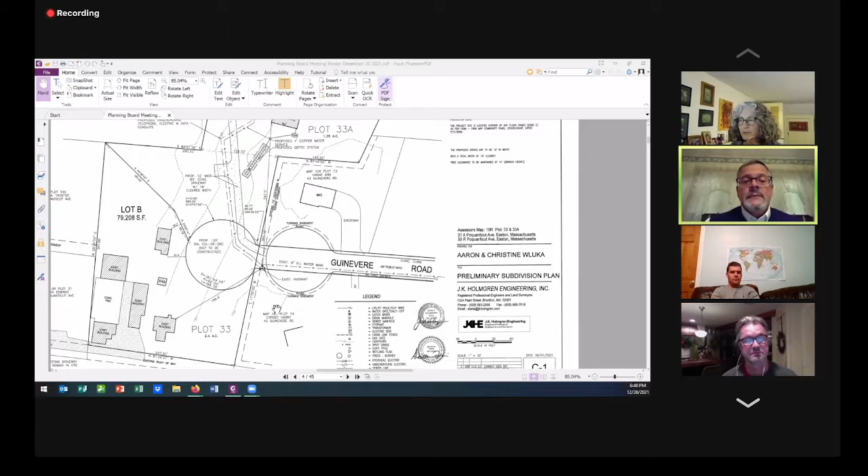So really that was the only significant change we made. We had a deed reference we wanted to freshen up, but besides that, that was the biggest issue, Mr. Chairman and board members, just eliminating that driveway. There was some concern from the neighbors about a possible cut-through from Guinevere down Aaron's driveway and out to Poquanticut. Eliminating that, I think, took care of that concern, or at least we hope it did.

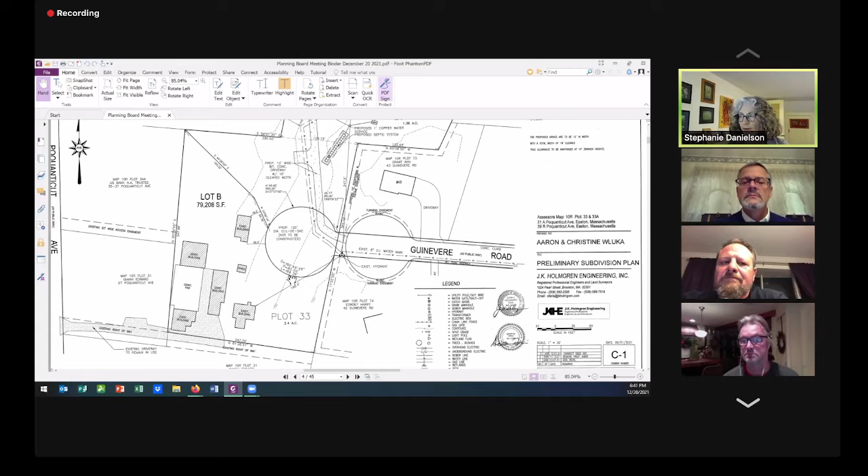I'm assuming everyone can see the plan on my screen. Yes. Okay, so the driveway that Scott was just referencing came off the cul-de-sac here and went over to the Wluka home here. That was the driveway that was eliminated.

And they did provide updated deed information confirming ownership of the properties. And I know there had been discussion of a deed restriction and possibly another method to ensure no future development. You want to touch on that, Stephanie?

Yes, I talked with town counsel. The board had mentioned two methods of ensuring that the lots weren't further subdivided in the future. One was through a deed restriction, and one was through the decision, having a condition that there would be no further lot additions to the subdivision. Town counsel was comfortable with both.

If you just do the deed restriction, it has a 30-year lifespan. But if you have a condition on your decision, it lasts in perpetuity. So the suggestion was to do both. We've seen it done both ways, where you have a deed restriction.

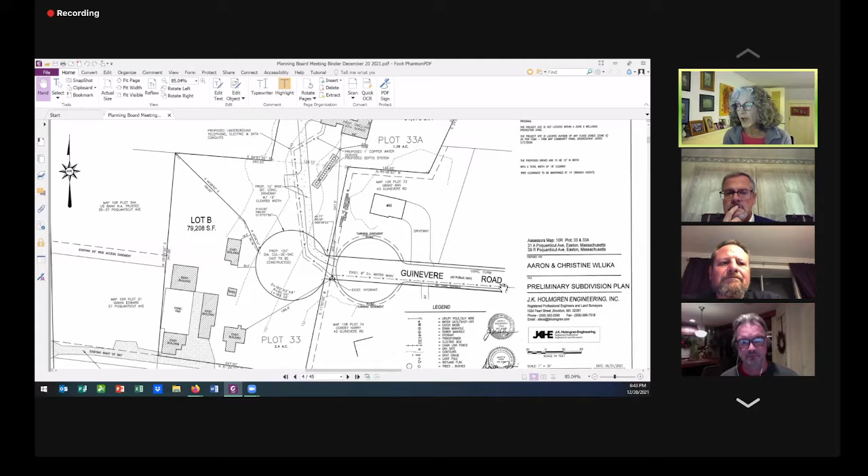I'm assuming that restriction would be on both Lot B and Lot A, that there would be no further subdivision, and then you'd restrict the subdivision itself to the number of lots at this point in time. I'm sorry, I haven't counted how many lots were already permitted for Guinevere Road, but you just add that one additional to the total number.

Questions, comments, board members, applicants? Anybody? Are all on the same page? You have some questions, Greg? Oh yeah, I see two just popped up. Yeah, go ahead. I'll let Kevin. Yeah, I see Kevin Cunningham and Ann. Oh, I didn't hear I was allowed to talk.

Hi, sorry about that, I had to rejoin. Kevin Cunningham, 62 King Arthur. Welcome. Thank you, my notes are just on the other page. So I wanted to know, what is the board's definition of a paper cul-de-sac, and how often and why would we approve it in this instance?

So that's sort of three questions. Well, since you addressed the board, there's no, best that I can recall, no definition of a paper cul-de-sac. But to your point, I can think of two for sure that have been done in my tenure on the board over the last 16 years. There may be more, that's just all I can recall at this point.

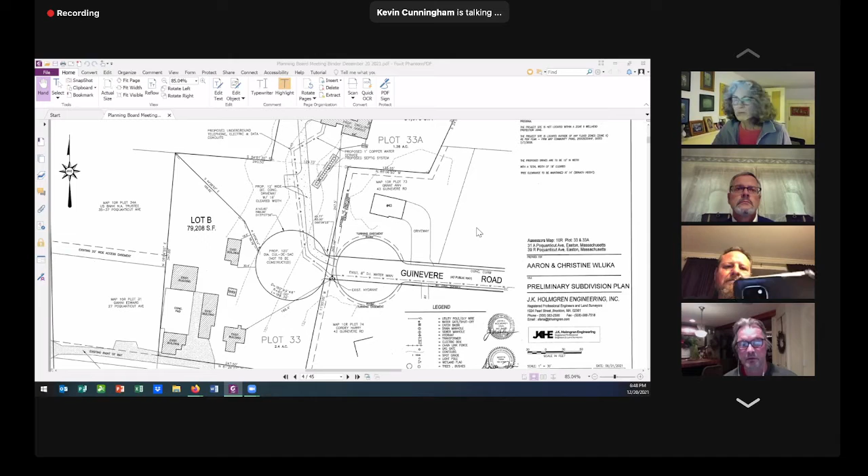I really appreciate it. Stephanie, I want to address that, as a citizen, so you can understand—I'm really proud of the work that this board has done all these years, because we really do put a lot of thought into it. We're all citizens of the town, and I understand, it's so hard.

I live about a mile from this site, and I'm surrounded with lots of trees and open space. Some of it has power lines on it, some of it's just land that hasn't been developed yet, some of it's land that will never be developed. But if one doesn't—what I learned years ago—we can't control the land that we don't own, and that doesn't mean we have to agree with what goes on with it, and doesn't mean that we can't participate in trying to shape what can happen there.

But I look at this piece, and keep in mind, there's been no vote—this is just a preliminary subdivision plan. This board may choose to vote and say no, we don't approve this preliminary subdivision, or we think you're on the right track, go ahead and do a full filing. But that vote hasn't taken place yet. One of the factors I, as a member of this board, would look at is, can this piece of land be developed within the bylaws of the town?

And it could, by extending Guinevere Road. Now, that doesn't mean that the people that live at the end of Guinevere Road are going to like it. I understand that. We all wish we could control, or at least I wish I could control, a one mile radius around my house, but it's the scourge of my life.

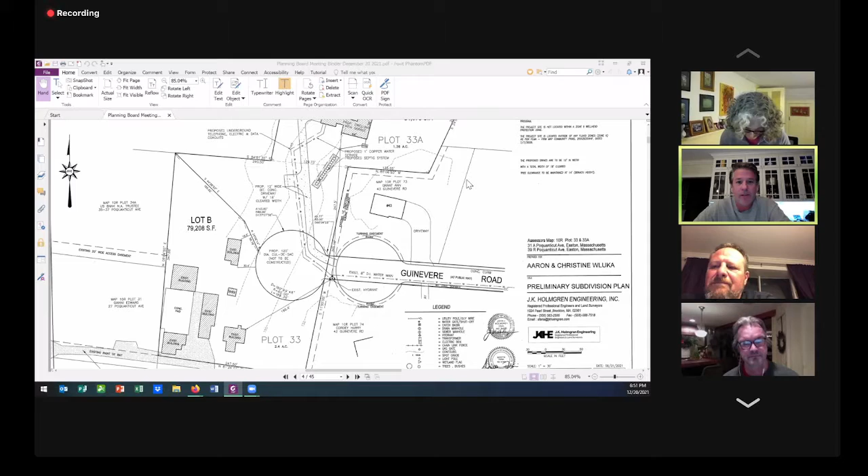I understand, and I appreciate all of that. But at the face of it, or if you look at the details, we are changing this. This request has been made several times over the past 10, 20 years. So why today or this week are we thinking this should now be approved after not being approved in the past? Again, I don't want to take over the whole meeting, I'm sorry to continue to talk, I'm sure there's others who have questions. But in my head, I'm still not convinced. Greg, I really appreciate your time.

No, I understand, and I really appreciate, Mr. Cunningham, your participating and your feedback, and we take it all to heart. And I totally understand what you're saying. But yeah, I'll move on, since I have a bad habit of being long-winded sometimes. Just ask Attorney Marioni.

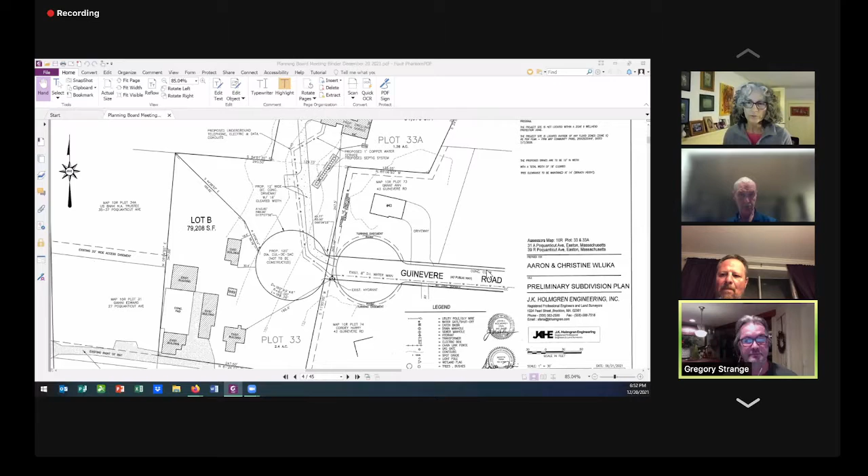And Grant, I think I saw her up there. Hi, yes, can you hear me? I can, everybody? Okay, great, yes.

I'm afraid the change to the proposal doesn't actually address my concerns, because the applicant owns both of these lots. Last time the board met, I asked how do you enforce keeping the applicant from just using that driveway to the other lot, just driving right over there and exiting that way, instead, and essentially still having a pass through on his own property since he owns both? It doesn't solve that problem for me at all. And there are two rights of way to Poquanticut from his property right now.

I understand and respect the goal of making land buildable where it can be made buildable, but to me this isn't the only way it can be done. What it does is give this individual an opportunity to use that as a pass-through that he shouldn't be given, and I haven't heard yet how it would be enforced to prevent him from doing that at all.

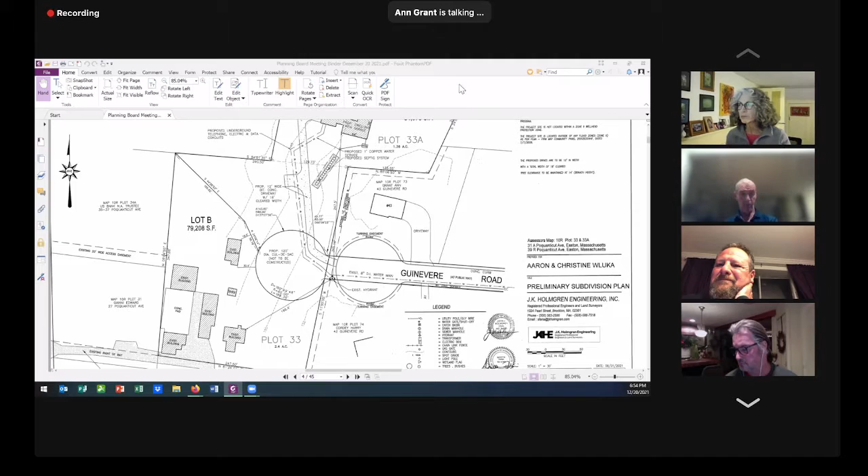I worry that it's based entirely on trust. My concern with relying on trust here, saying this individual is never just going to throw down some gravel and drive across, is that when he initially proposed this, he said the reason he needs these driveways is because his house can't be accessed easily. It can't be found for package delivery, and it can't be found by safety personnel. And those two rationales didn't really hold water, because they could both be easily fixed through alternate means.

So now that driveway is deleted from the plan, and the rationale originally given is not really what this is about. I'm asking this board not to allow him to get the variances or waivers that essentially give him access, even if the plan suggests the driveway would only go to a different lot.

Okay, Stephanie, I've been talking an awful lot, do you want to take that one? Well, my assumption is that Mr. Wluka is going to be selling the second lot that's to be developed, and that will be a new owner, who I would think would take—

I don't know that there is anything to prevent him, other than that I believe he'd have to clear some land to get to that driveway. There's nothing. But there actually is—is there a stone wall? There's a stone wall and there's a curb there. And he's taken the stone wall down in the past in order to remove stuff from his property, from what I understand from other neighbors who lived here before me.

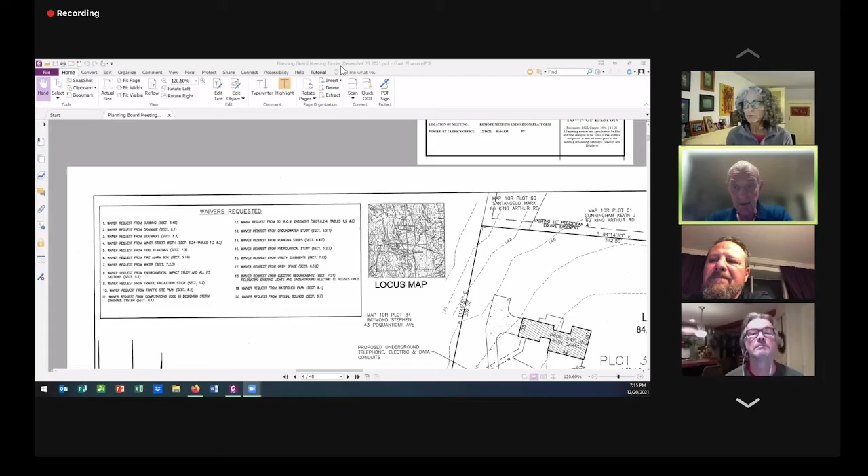Right, so that's the time to discuss this, including maybe something that will satisfy blocking the access from Waterview to Buchanan. Correct, that's the time to do it, when we approve the definitive. Yes, tonight we're just approving for them to move on to a definitive plan where they'd have to do a full filing, and what waivers would be addressed at that point.

Not that we can't discuss them now, but any other requirements would come up during the definitive. This is just an optional step in our bylaw to allow an applicant to come in. We've worked flexibly on lots of parcels of land, given our existing inventory and the characteristics out there, and this is why this process exists.

But also the definitive plan needs to contemplate some of the things that have been said here. Oh, absolutely, I didn't mean to imply that they wouldn't. No, I'm just saying that's the time, that's when it would happen.

Tonight we're not really getting into it, we're just saying yes, go ahead and file for a definitive subdivision along the guidelines of what we talked about. But again, it doesn't obligate us to vote it in, and it doesn't remove the ability to add requirements along with what you're discussing. It needs to be clear to them that those waivers are still in the air at this point.

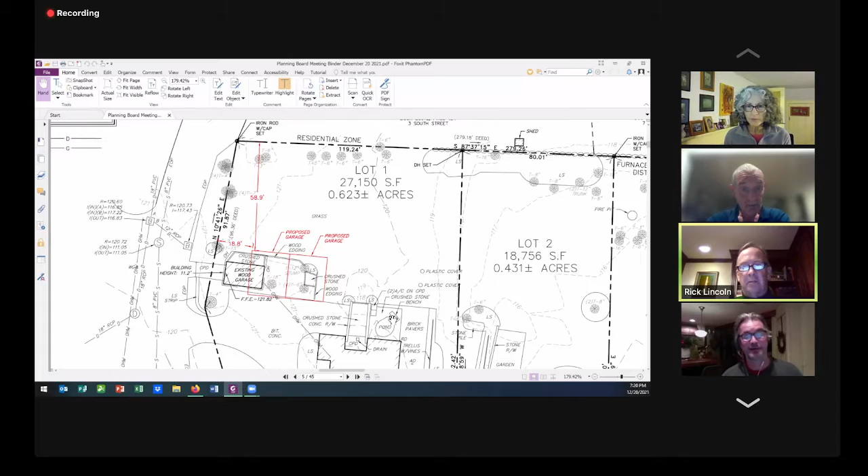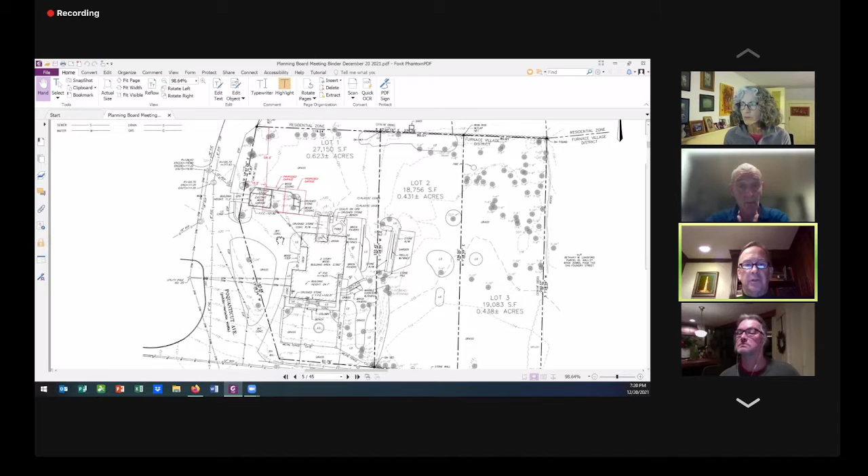So as we discussed last time, there's an existing house built at least a couple hundred years ago, and obviously in the historic district, so that's where much of the discussion has focused. There are no plans to modify the exterior of the house, with the exception of a front portico, which I think the consensus is was not on the house when originally constructed. So the plan there is to remove the portico, upgrade all the windows, and add a little deck on the rear. Those are kind of minor changes.

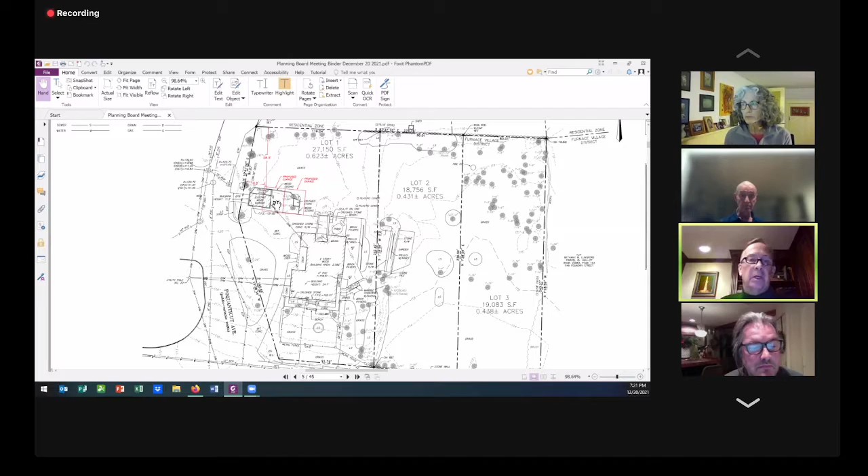The other change, which I think was the reason we continued to this hearing, was that garage, which is a red line in the rear. So the proposal is to tear down, there was an existing, I'll call it a shed right there, they call it a wood garage, could have been a one-car garage a long time ago, and replace that with two garages. And I guess the charge to me at the last meeting was trying to get some elevations that would be consistent with the historic nature of that area and kind of complement the house.

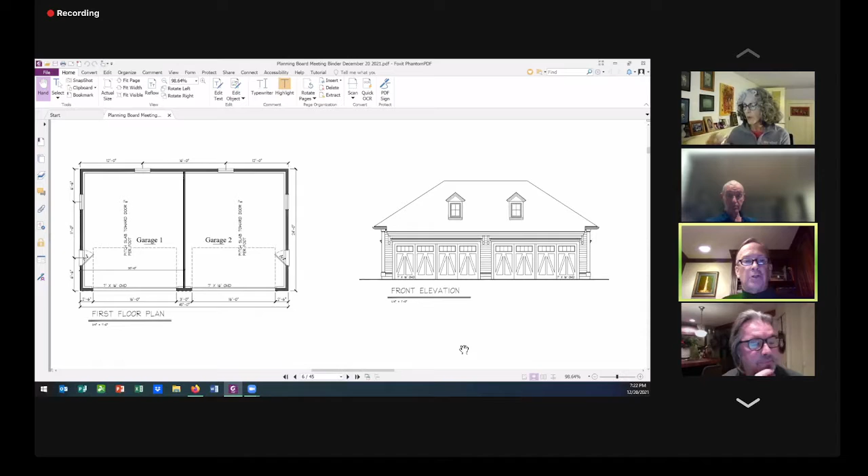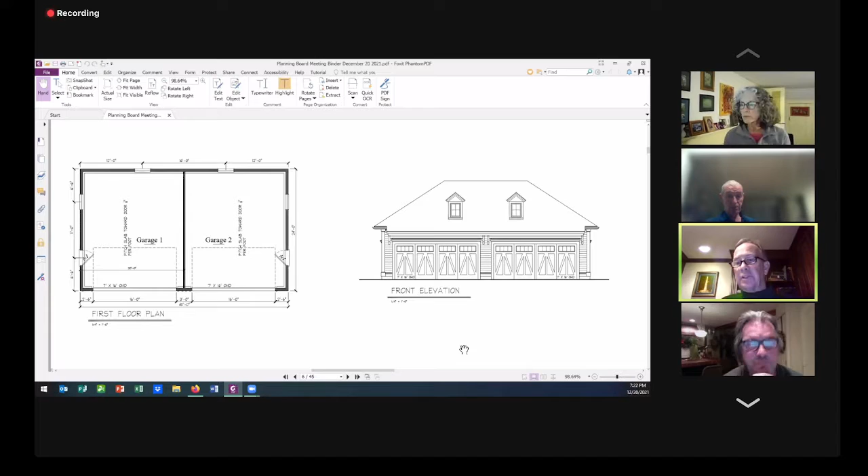So there were 3 or 4 iterations of the garage by my architect, and this is the one we kind of landed on. So that's the proposal, and garage 1 would serve the first floor of the condominium, and then the second floor would be serviced by garage 2. So we're hoping the garage gets approved, and then obviously I'm going for a 2-family, which, the existing is a single family. And that's about it. There are no other changes proposed to the exterior of the house, nor the site.

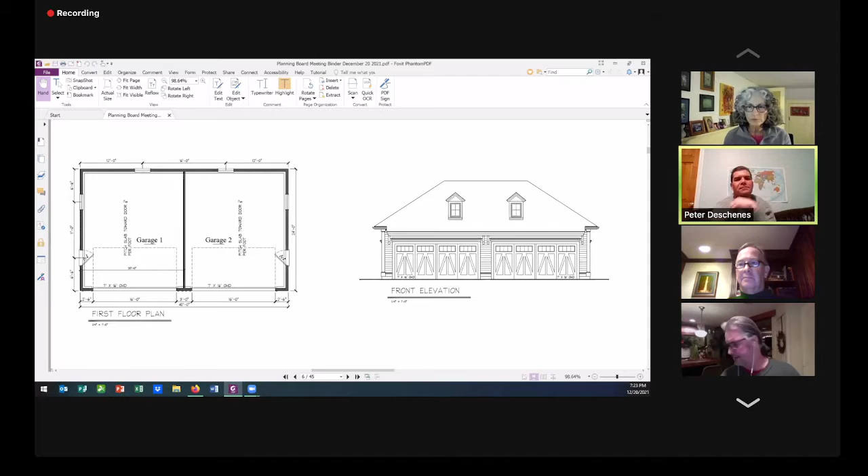Greg, you're muted. There you go, forgive me. Stephanie, do you have anything you'd like to add?

No, nothing to add. So I think, as I mentioned, the Historical Commission has a 35-day period to review this, and I know there's going to be a meeting in early January. And I know, as Mr. Lincoln discussed at the meeting, he was thinking of replacing the windows with maybe simulated divided light windows on the front of the house.

Going back, removing some of the modern colonial casing on the windows, going back to more period specific, and removing the portico complete with built-in orange AZEK seat, or bench I guess. And those items will get reviewed in a little more detail by Historical Commission, and then he's adding the garage.

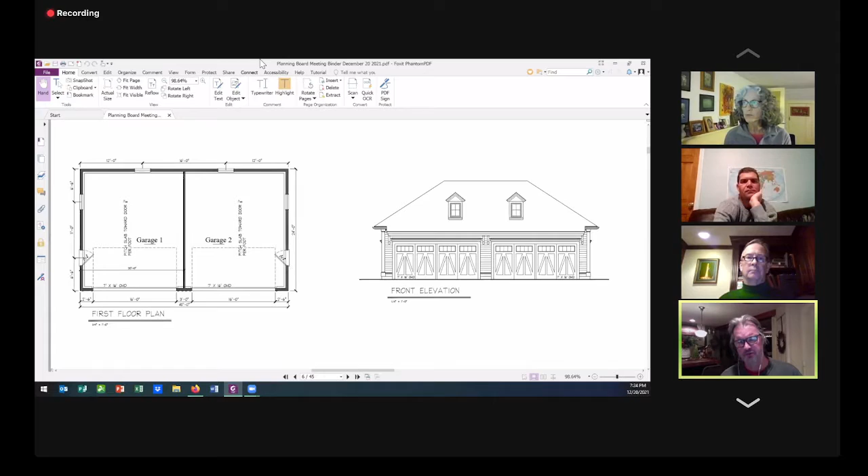So this is our first time through with the bylaws. Would we look to vote on this tonight, or do we probably need to hear back from Historical first? I think you need to hear back from Historical first. Yeah, I think so, good.

So board members, any questions or comments? I think this is great, and I think that's why we have the duplex special permit. The applicant's been working with the town on this, so it's good. I think it aligns with the new rezoning and the objectives we have for this area as well. It's a good project.

Chris or Bob, either of you guys, any thoughts? Yeah, I concur with those thoughts. Same, sorry I couldn't make it on site for the tour. Well, that always happens every time it's your turn to buy the coffee. We've noticed that.

At the on-site, Tim Hurley, who is the chair of the Historical Commission, agreed to get that meeting scheduled as quickly as possible so as not to hold this up. I think I heard talk of first half of January.

Just so folks at home know what we're talking about, there's an overlaying historic district in this section of town, but it really has no protection, it's more of an honorary title. So the bylaw allows an opportunity to increase density to help revitalize this area, for restoring and preserving homes. Mr. Lincoln, this house is one of the Belcher estates, the two brothers who ran the Foundry right across the street, and he's looking to update and revitalize the outside along historic lines, and is adding a dwelling unit.

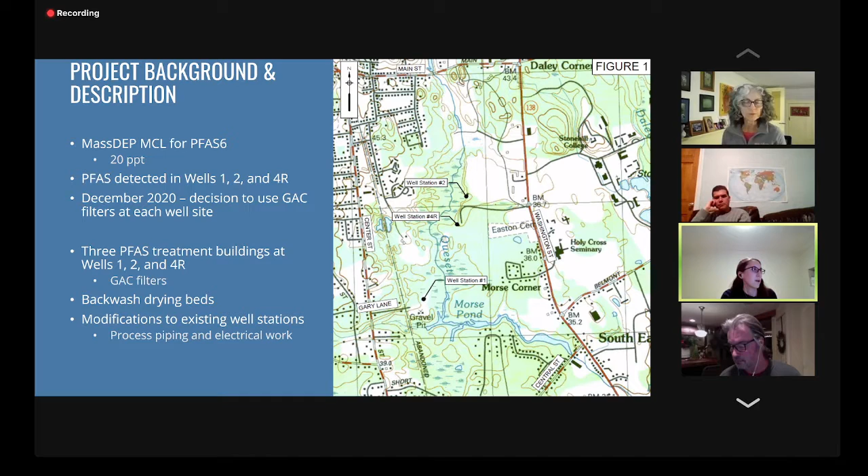We also went through permitting with the Conservation Commission because the sites are located within several critical areas, including wetlands, wetland resource areas, and the wellhead protection zone for the public water supply.

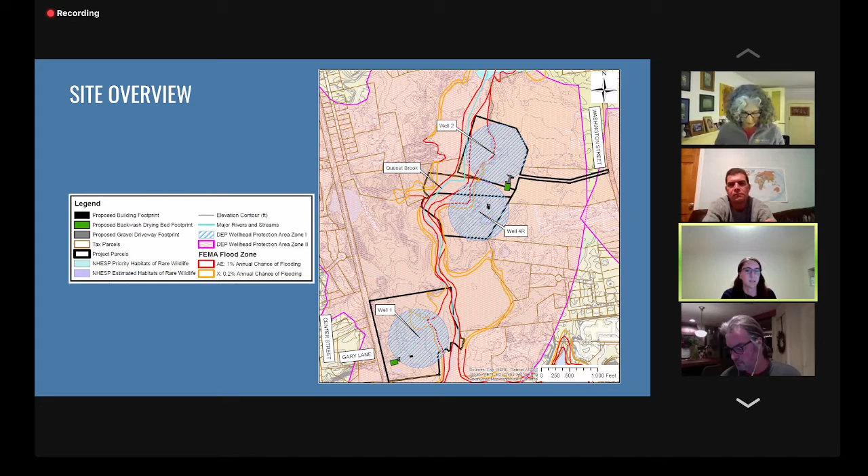At well 1, site access will be off of Gary Lane. Gary Lane is a dead end off of Center Street, and there is an existing well station to the northeast. We are proposing a treatment building to the south of that existing access driveway, and we also will have a backwash drying bed to deal with the treatment waste.

Between the existing well station and the treatment building, there will be underground electrical and water mains going back between the two buildings. We'll also have some site utilities extending out to the drying bed.

Here we need a new propane tank for the HVAC unit in the proposed treatment building, and we have a tight tank to take floor drain waste from the building.

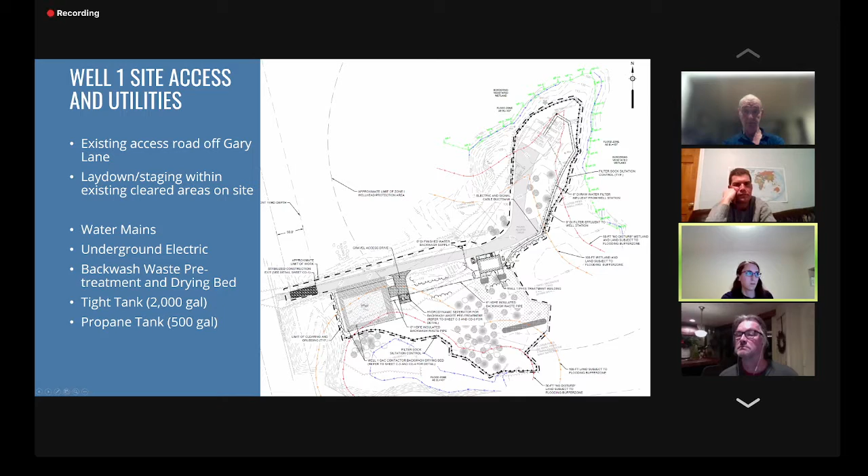This is a rendering of the proposed treatment building. It is approximately 20 feet wide by 40 feet long. We are proposing a shed roof on this, so the overall height is approximately 37 feet to the peak of the shed roof.

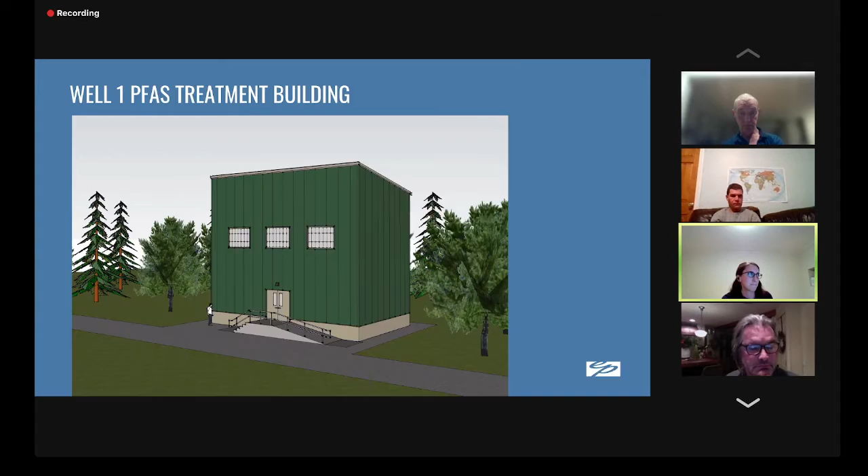Because we'll be adding impervious area, we need to improve the stormwater management system on site. The shed roof will drain into a gutter system with the roof leaders directed to 2 sediment forebays behind the treatment building. Those sediment forebays will overflow onto a vegetated filter strip and a stone infiltration trench. This meets all of the Massachusetts stormwater management guidelines for peak flows and treatment.

In addition, there are some areas on this site that are currently just bare, sandy, gravelly areas, so those areas will be reestablished with loam and seed.

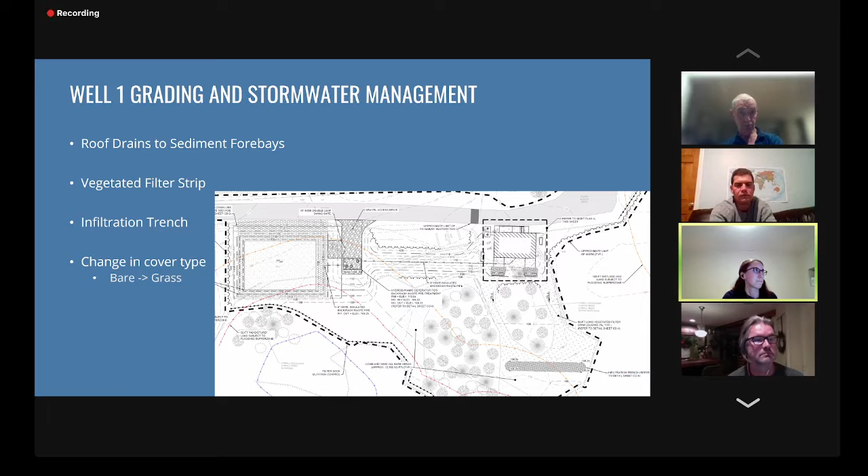At wells 2 and 4R, they share an access road off of Washington Street. Under existing conditions, we have existing well stations - well station 2 on the page right, and existing well station 4R on the page left.

We're proposing the well 2 PFAS treatment building near where those access driveways split, and the well 4 treatment building close to well 4. Again, there will be electrical and water mains going back and forth between the well stations and the treatment buildings, and these two treatment buildings will share a backwash drying bed.

Similarly, we have natural gas mains on site here, so there's no need for any propane tanks, but we will still have the tight tanks for floor drain waste. At well 2, there's no emergency generator, so we'll be adding one so that the town can maintain water supply during a power outage.

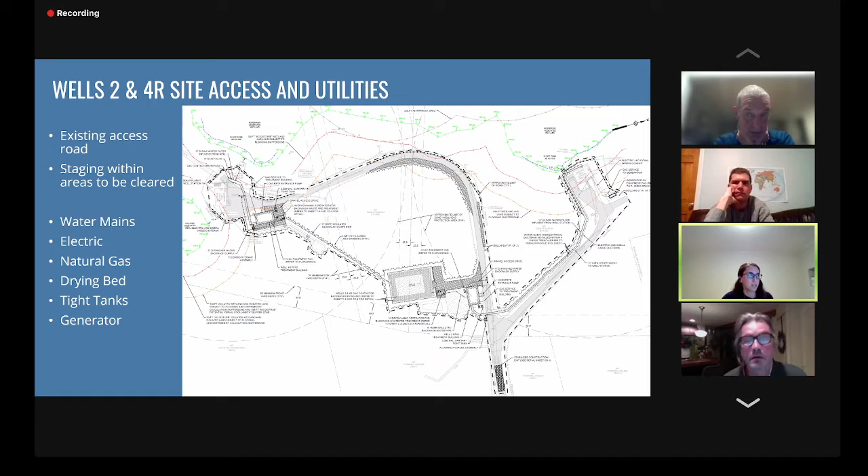Again, these two buildings will have a similar aesthetic to the Well 1 building. It's going to be just a pretty simple rectangular building with a shed roof, same dimensions and overall height.

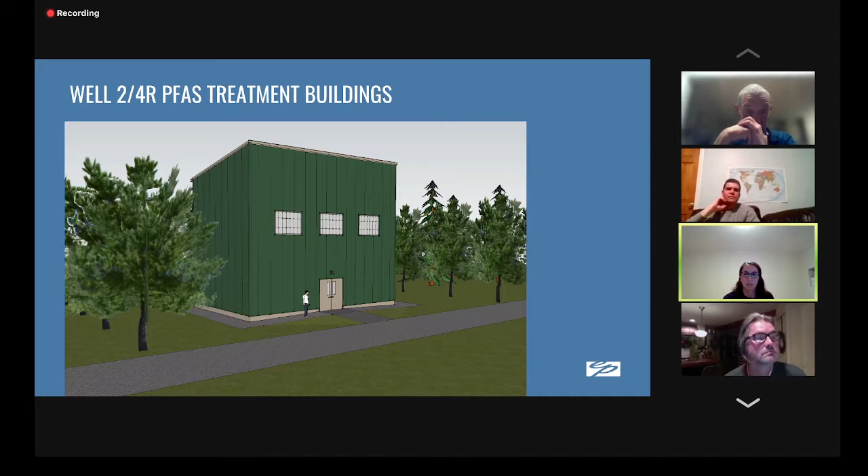At Well 2, again, we need to deal with stormwater. Here, those roof leaders will be directed to a vegetated filter strip, and then that filter strip will direct the stormwater to a bioretention planting area.

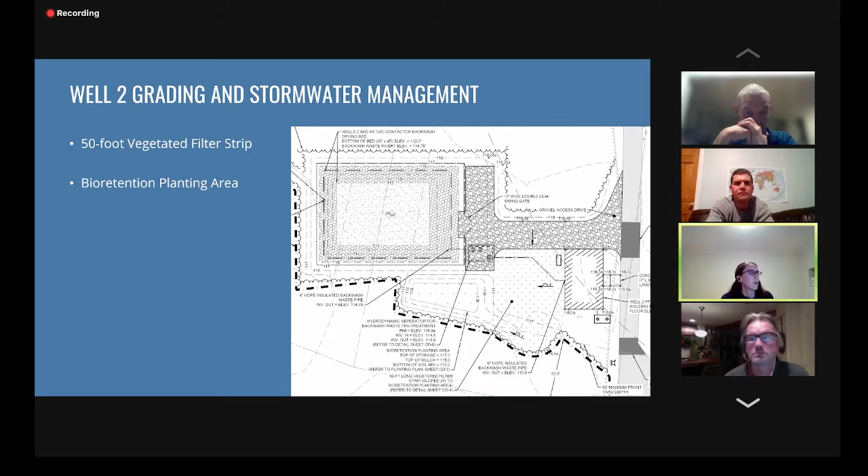At Well 4, the roof leaders will discharge into a gravel area behind the treatment building, directed to a grass channel, and then ultimately ending up in another bioretention planting area. The grass channel will have check dams to reduce velocities in the channel to prevent scour.

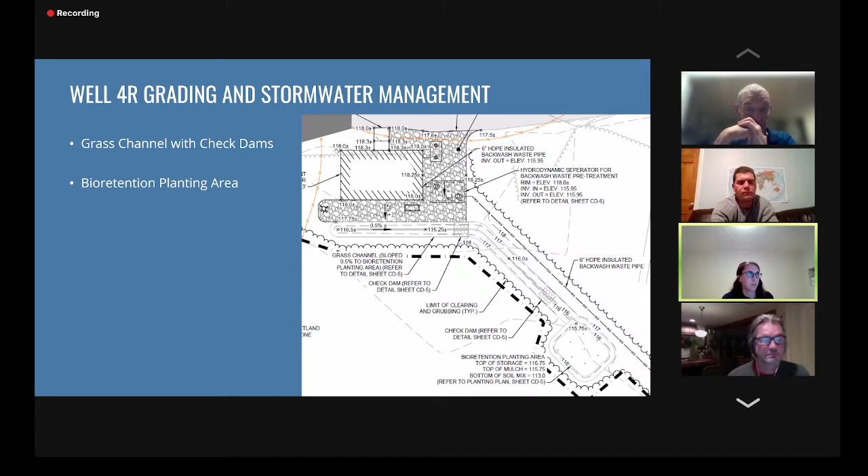So, construction. We expect construction to begin this summer, and it should be approximately 12 months from the time the contractor gets on site to the time that these treatment buildings are up and running. We expect there to be heavy civil earthwork for about 6 months of that time, and the rest will be work inside the buildings and startup of the treatment units.

The contractor will be required to meet Tier 4 emission standards, and they'll be directed to not idle their vehicles while working. Typical work hours will be from 7 a.m. to 5 p.m., and we will have a site safety supervisor on site at all times representing the town and overseeing construction.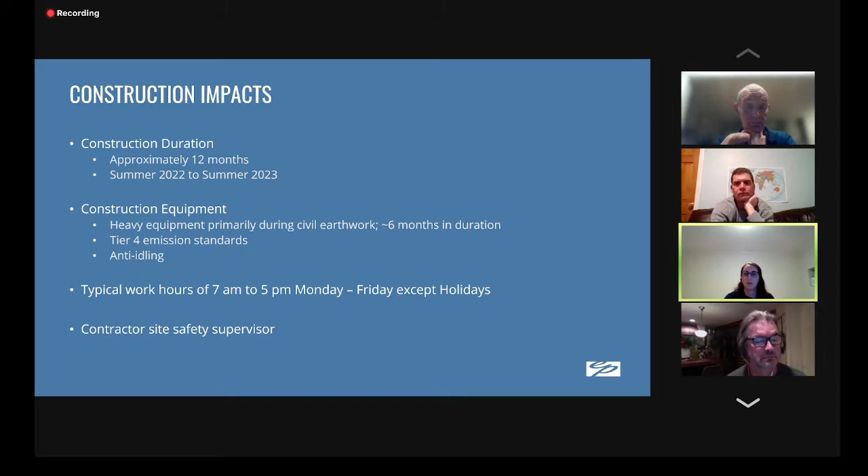Post-construction, the site security will largely stay the same. Those existing access roads have swing gates to limit vehicle access to town-approved vehicles. The backwash drying beds will be closed in with fences and a swing gate. The treatment buildings will have intrusion alarms connected into the water department's SCADA system, so that they can see who's coming and going from the site. And the town staff will make site visits daily during their normal rounds at those well stations.

For exterior lighting, we're proposing a single light over the double doors to the treatment buildings, and those must be dark sky compliant.

For noise attenuation, the standby generator proposed at Well 2 will have a sound enclosure, and it'll only be operated during a power failure or during routine weekly testing.

Each of the treatment buildings will have an HVAC condenser used to dehumidify the building, since the filter vessels will sweat, and the condenser will reduce the sweating. It's similar in size to a residential unit, so there should be minimal noise from that.

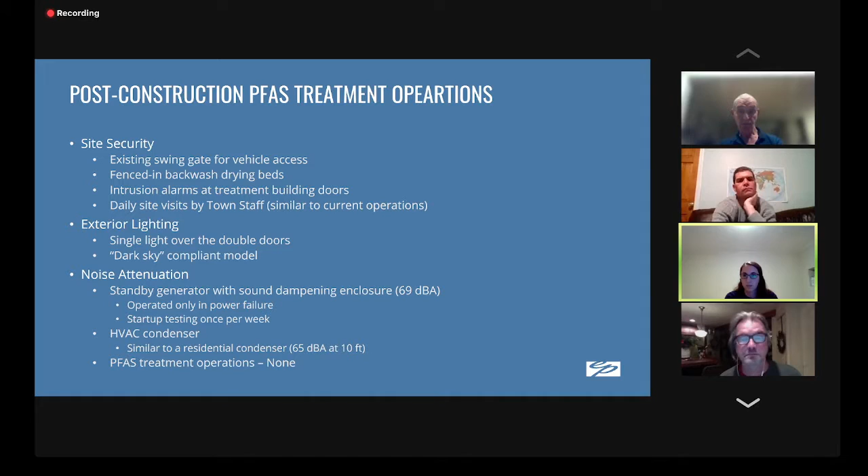The actual treatment operations for PFAS removal are just large pressure filters. There's no pumps associated with them, so there should be no normal operating sounds.

In terms of filter media replacement, the media only needs to be replaced every 2 to 4 years. That'll be completed by a vendor that does this work normally, and the media will be trucked onto the site and then back off the site.

Floor drain waste will be captured in 2,000-gallon tight tanks, and those tight tanks will have high-level alarms to notify the operators that they need to call to get the tight tanks pumped. That'll be by a third party again.

Things that are directed to those tight tanks include any hose water from the operators washing down the inside of the treatment building, which should not be a frequent event, and condensation from the filters and piping, and that's about it. The treatment buildings won't house any chemicals, so there's no cause for concern for contamination.

The backwash waste will be directed from the filters into hydrodynamic separators that will capture a lot of the fine materials in the backwash wastewater.

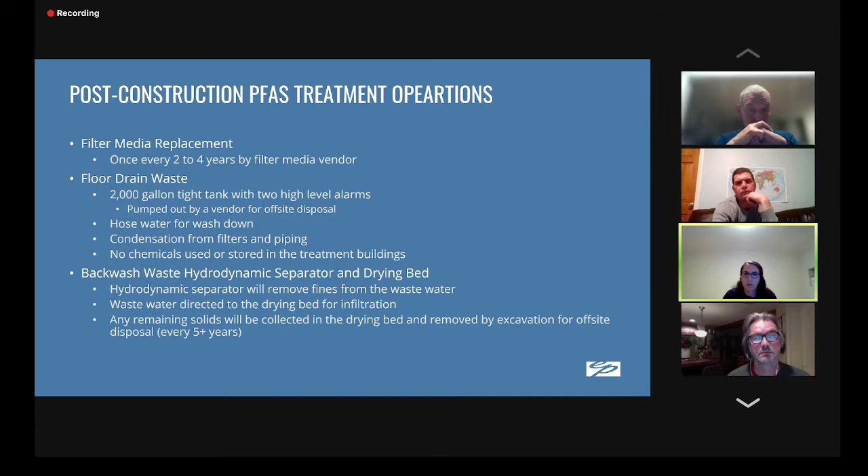That's all I have. If you guys have any questions, I can hand it back over to you.

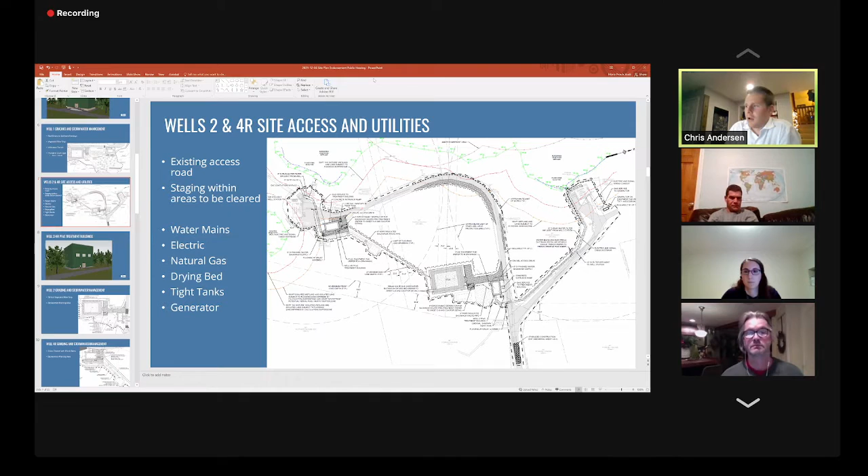I just had one quick question. As part of this project, is there a goal of reduction we're trying to accomplish? By a percentage or parts per million? I know Easton has PFOS, we all got the thing in the mail, so I was just curious about the goal of this.

Yeah, so the treatment goal is to be less than 10 parts per trillion versus the regulation, which is 20. In all likelihood, it will be lower than that on a typical basis. Sounds good. The idea is to comply, that's the reason we are doing it. Well, I think the reason is to get rid of PFAS, or to reduce it anyways. I for one support that effort.

I have a question. The DPW or the town is responsible for maintenance of these locations? Yes, they are, and they currently maintain the well stations at these locations.

Any further questions? Motion to approve the site plans for 218R Center Street and 95R and 100R Washington Street. Second. Any further discussion? Hearing none, let me just check. For the record, I see no hands raised or chat started on Zoom. All those in favor of the two site plans being approved, Strange aye, Andersen.

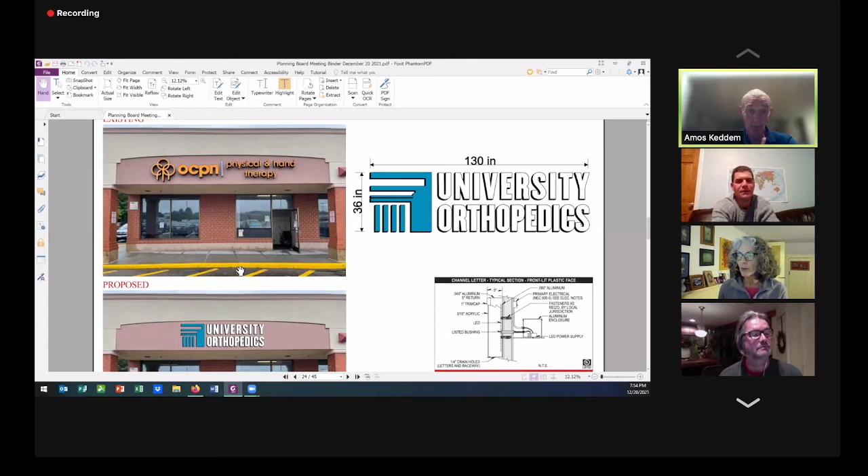All right, let me get to those. Just a second. It's channel letters, I like it. Hold on, they listen to us. He's a giant. There we go, nice. I think we made it 130 inches to scale.

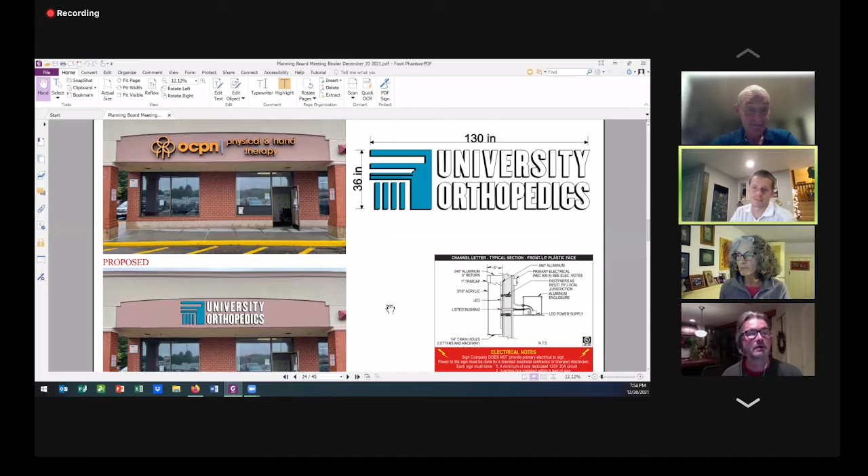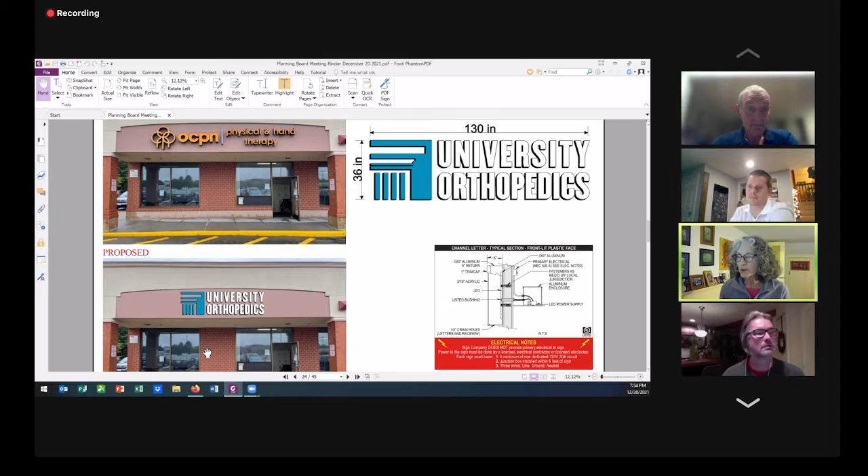Okay, so the top one would exist, this is the proposed. Yeah, it's channel letters. Meets all the bylaw requirements, right? Yeah. Questions, comments, anybody?

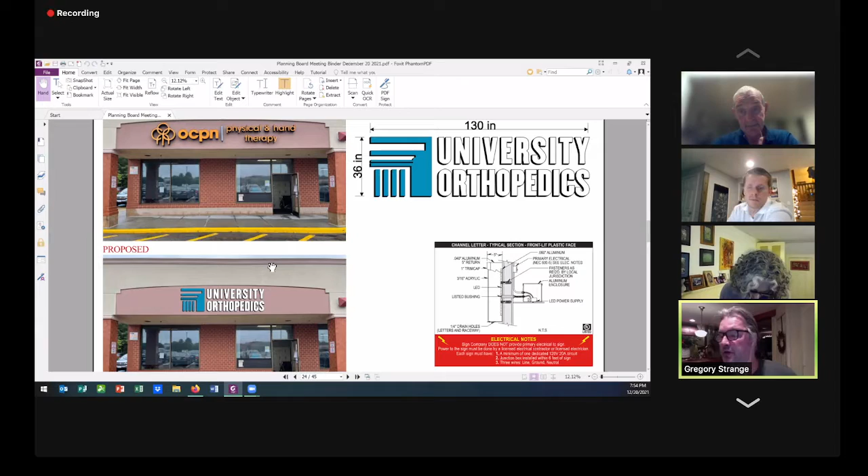Motion to approve 20 Roach Brothers Way. Second. Any further discussion? Hearing none, seeing none, all those in favor, Strange aye, Kevin aye, that's an aye, Anderson aye. Okay, definitely faster too. All right.

Let's see, next up, I can't really make that any smaller without it. 15 Roach Brothers Way. Again, you can see this is the existing down here in the right-hand corner, and this is what they're proposing.

So they're just kind of rebranding here? Yes, yep. And you can see they show you what it will look like in the evening. We have to start breaking our bones, these guys can just make new signs just because. I've helped.

Motion to approve 15 Roach Brothers Way. Kevin, that's second. Any further discussion on the motion? Seeing none, hearing none, all those in favor, Strange aye, Shane aye, Anderson aye, Kevin aye. All right, that's unanimous.

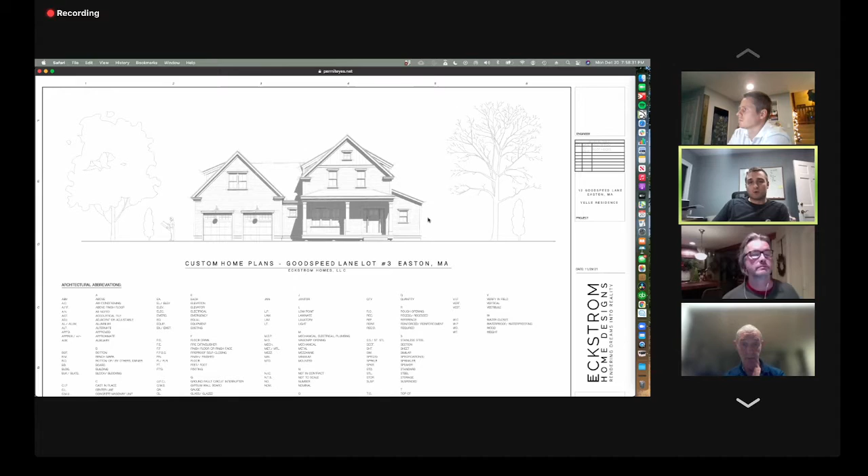I'm ready to share my screen if I may. Sure. Everybody see that plan, Andrew? Yep. Okay, so in the last meeting, we got some feedback that the building height proposed was about 3 feet too high based on the setbacks. So we have reduced the building height by changing the design of the main gable a little bit, and the overall goal is to bring down the scale of the building to fit a little bit better.

I'll just go down to the height here. We have calculated the mean roof height to be 25 feet from the existing grade plane, and before, I believe we were about 28 feet. So that's about it. All that I ask is that the board hopefully proceeds with an approval for the design.

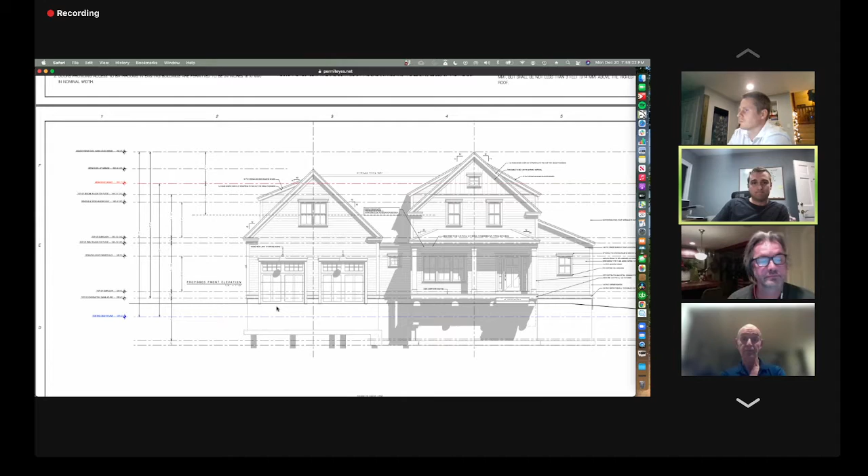Okay, so the couple of, I think you're over by an inch on your building height, but at least on the plan I saw, but that's obviously easily fixable. But I thought when we were all together last, we talked about the setback is what's in the district, not zero, even though that was erroneously written on the plans. It was 25 feet. And forgive me, I'm trying to find, but I think you had 21 feet to the house. Was I wrong on that, Stephanie or Ethan? Or I don't know if you guys had a discussion. Why can't I find this? We did not have a discussion, but I think you're correct, I think it's 21.

I know at the last meeting Mr. Eckstrom brought up that he thought there were 1 or 2 lots in Weber Estates that were less than 25 feet. As you know, I had to recuse myself since I did the building designs there, but it had nothing to do with the sites. I'd never seen it, so I went and checked, and there were a couple that were less than 25.

But I still say the same thing I said that night, and feel free to correct me, but I've discussed this with the planning department and I think we're all on the same page that the underlying district here is residential. The front setback is 25 feet. In the residential district the rear is 20, sides 15. But in the flexible development, it calls out that the sides are 10 and the rear is 10. It doesn't address the front.

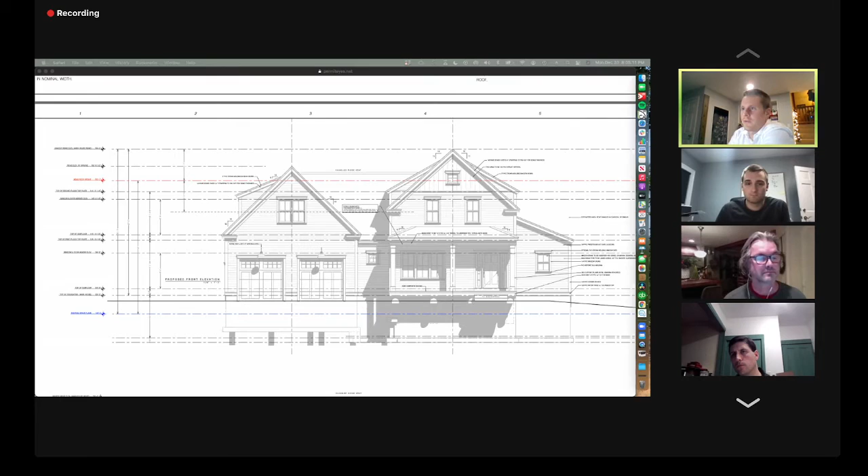I'll move to conditional—go ahead, Chris. I make a motion to approve the architectural plan for lot 3 with the condition that the building be slid back so the yard to the porch dimension is 5 feet or greater. Second, Stetson. My audio keeps going out—Stephanie, was that okay with the motion? Yep, it was perfect.

We have a second, right? Or, I'm sorry, was there a second?

Yes, sorry, I had to put my dog down the other day. It's been a very stressful week.

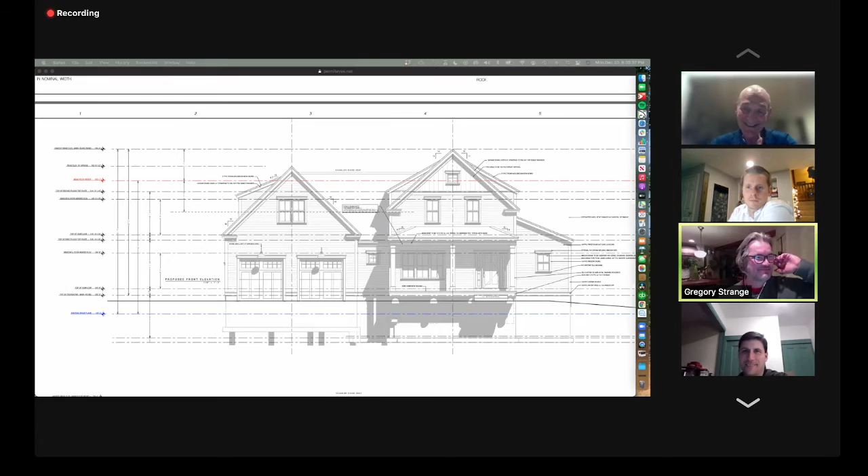All those in favor, all right, any further discussion? Hearing and seeing none, all those in favor: Strange, aye. Shane, aye. Anderson. Stetson, aye. Cameron. All right, that was everybody.

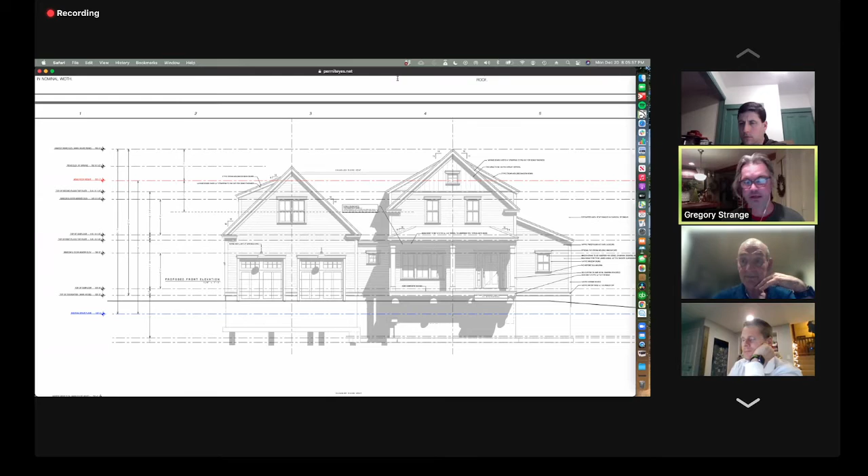Great, thank you. Good luck, Mr. Eckstrom. Happy holidays. Thank you.

We move on, jump back. I don't know why the agenda keeps disappearing from my screen. Comprehensive permit, Blackledge, ZBA request for comment.

Greg, I asked Suzanne to put that on the agenda. The board will hopefully remember, it was a few months ago, I think October. The board was asked for comments on the comprehensive permit for 89 and 91 Union Street, that proposed 108 unit, 2 buildings, 108 units in total residential rental property. At that time, the applicant had not submitted the engineered plans, and those were submitted just before the last meeting.

That we missed, so I wanted to make sure the board was aware those plans are out there. Suzanne can send them to everybody, direct you also to the ZBA public view of PermitEyes. And at the next meeting, if the board wants to discuss and provide comments, they would be welcome.